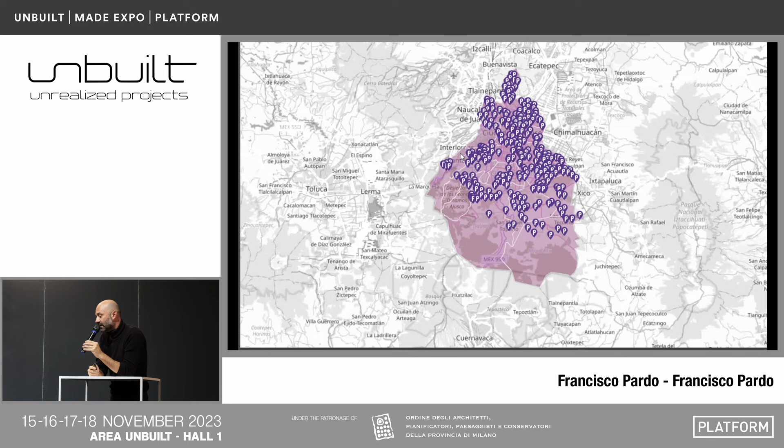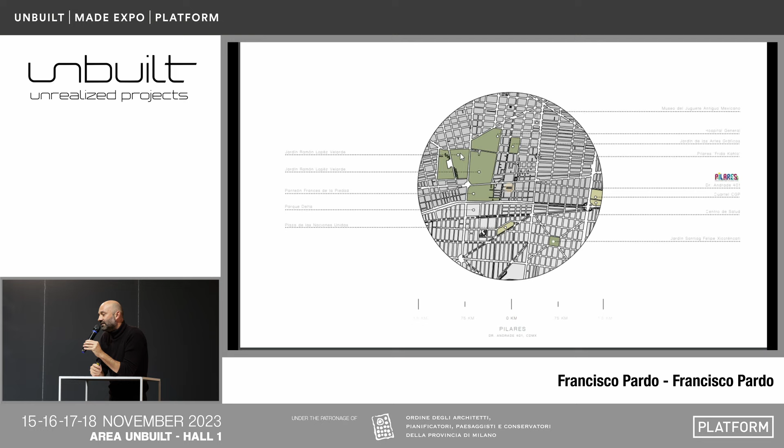This is the one that they gave to us. It's in a very important part of the city because it's one of the most dangerous areas, a place where they sell auto parts. The building we got is an old care center for kids from the 50s.

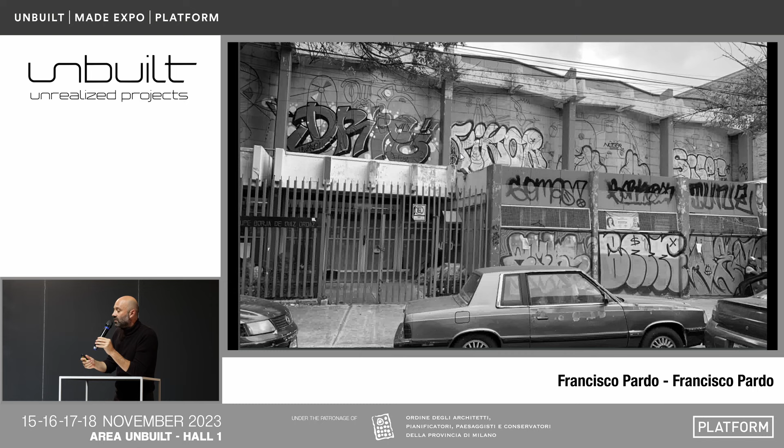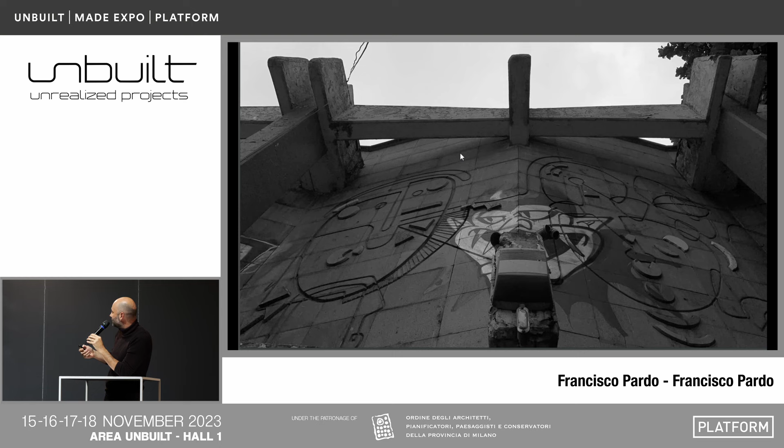It's part of the health department. They had this infrastructure, beautiful buildings, but very decayed. We were asked to use this building and transform it into this Pilares project. It's a fantastic structure from the era of the modernist movement. So this is the actual condition of the building.

Our proposal starts by following certain rules of engagement to do a project. First, we don't demolish anything that is good quality. In my office we have a rule that when we do retrofitting, working in existing projects, we do not demolish anything already built that has quality of architecture. But also we don't do fake historics, we don't do anything that isn't of the time of now.

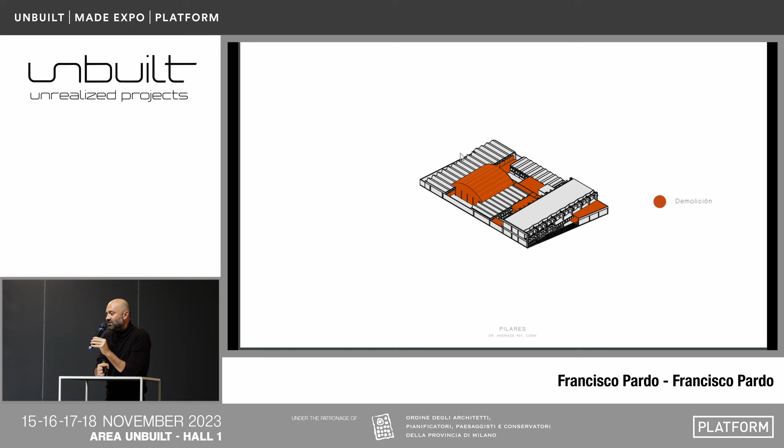So the first idea was to demolish everything that was done after the building was built, these ephemeral structures that cover the patios. The decision was to demolish this and leave the clean structure as it was. That is this one.

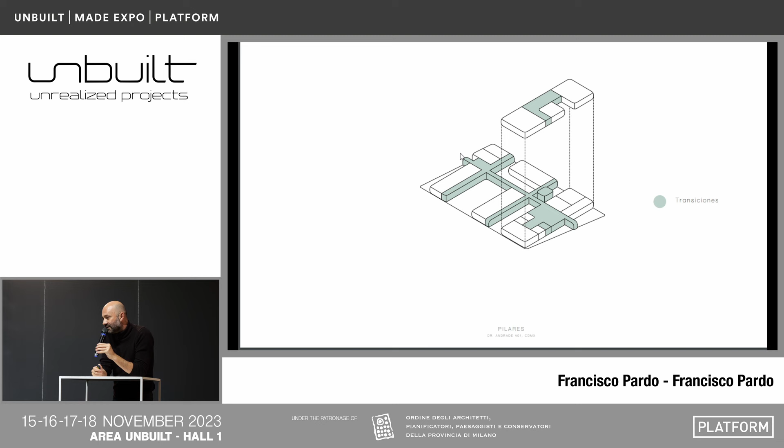Then we start to do some programming like this, and each one of these structures has one different activity. That's construction - studios for carpenters, for mill workers, for everything that has to do with construction.

So the idea of the government is to train, besides giving everyone the opportunity to do a career like a doctor, an architect, an engineer. The idea is also to do these technical, professional things that are important for our society. We need all the layers of manufacturing.

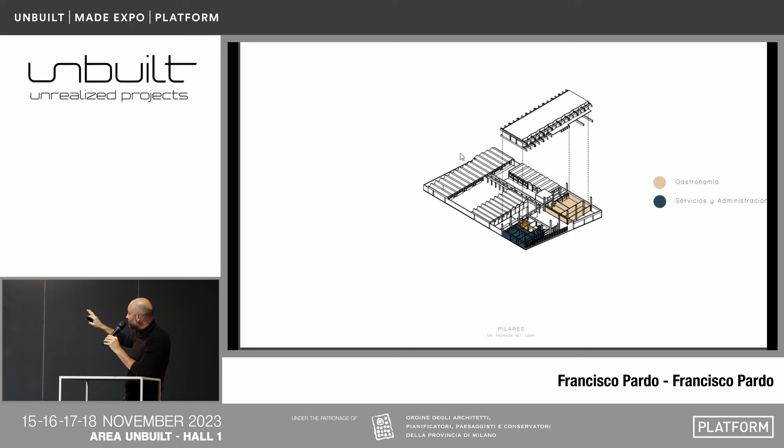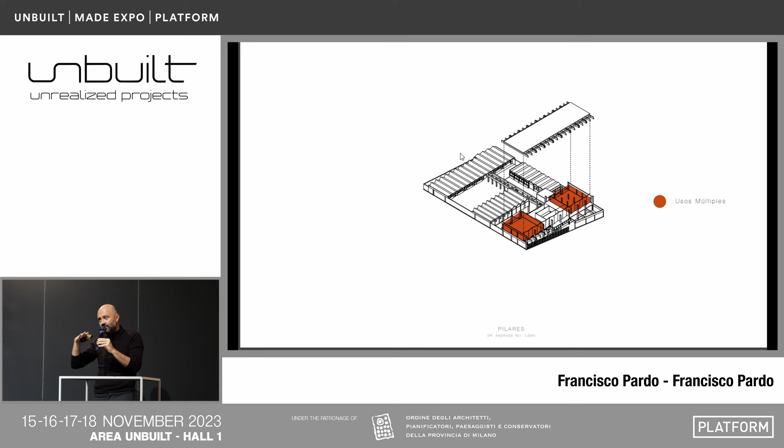So this is art and design. This is technology - technology has to do with computers, apps, robotics. There's another part that's very important, gastronomy, and of course services and administration. Then in the upper floor we have a couple of auditoriums - one serious auditorium, and the other a multiple use space.

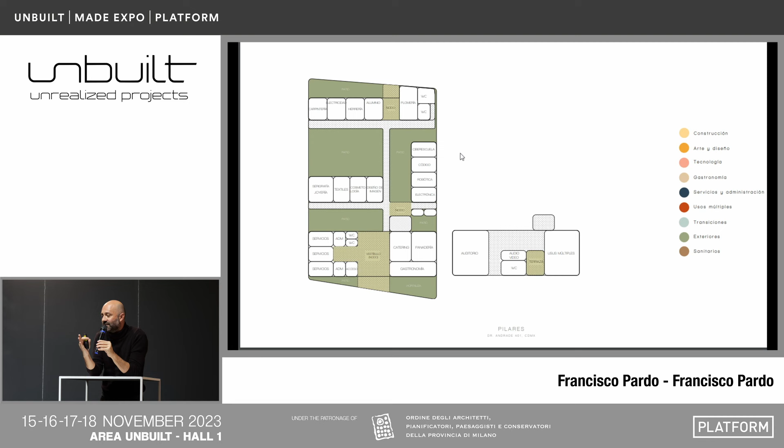Very complex drawings that I'm not going to go over, but it's important to show that the structure of the building was kept as it is. We just reprogrammed the whole building. So this is a fantastic drawing that we really like.

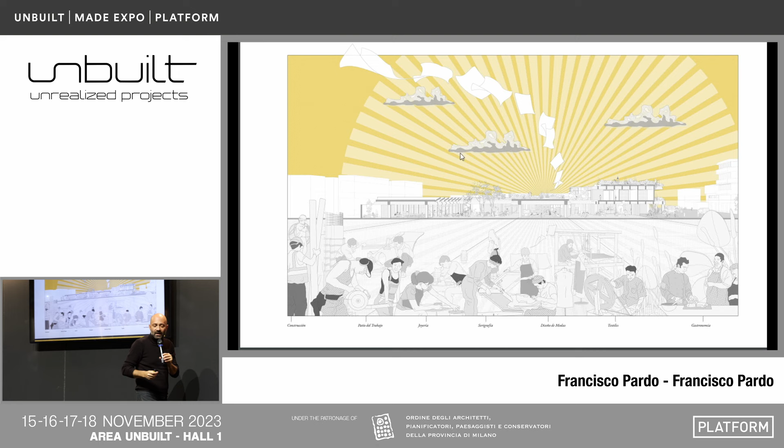Laura and I worked a lot on this drawing to show the activities - gastronomy, textiles, design, serigraphy, jewelry, workers, construction. It's a drawing that puts the whole landscape of possibilities. I'm going to go into detail, so each one of these spaces has to be active.

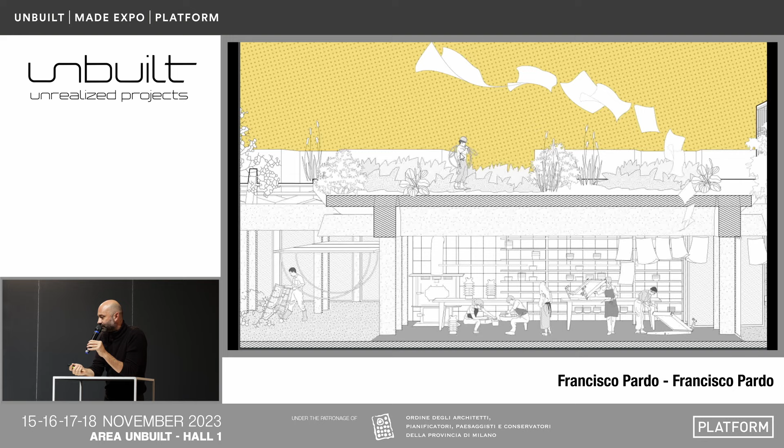The activities done here are based on the necessities of society in a culture and place like Mexico, where you have a poor demographic that is really bad. So the aim is bringing people to know how to do certain manufacturing things. I'm going to run through this beautiful.

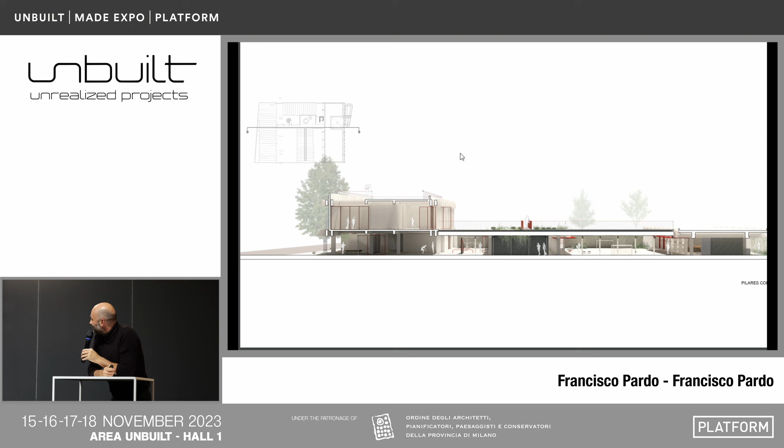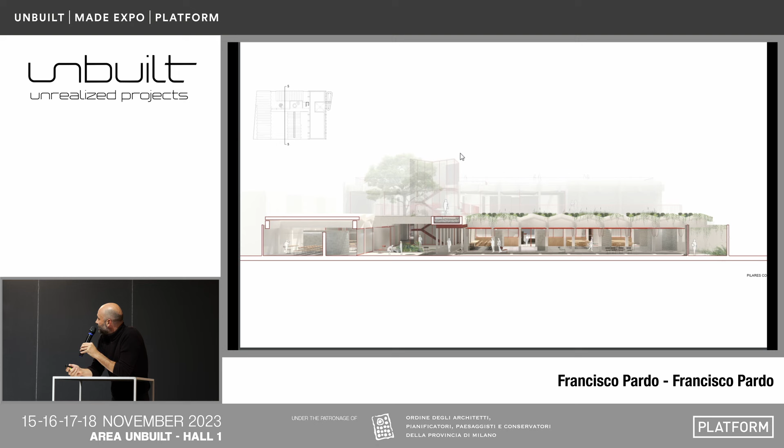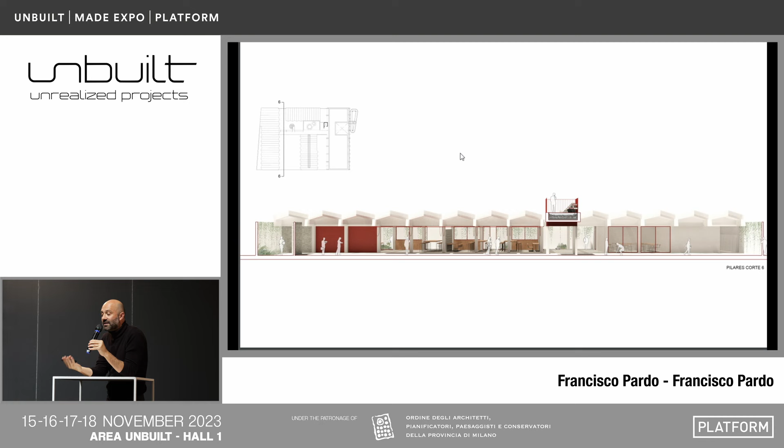So these are different sections of the building. If you see, the building has this amazing roof, how do you say, I don't know the word in English, but this roof that brings all the light from the north, that is fantastic, because this used to be a care center for babies. So it was part of that structure that was already working. So what we did is we just reprogrammed the whole thing.

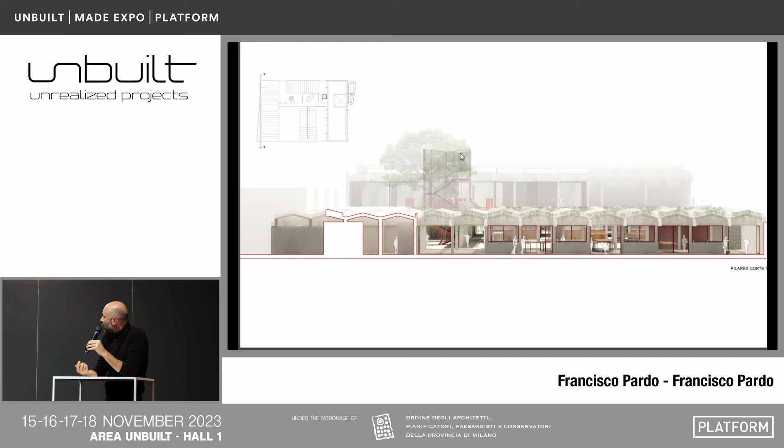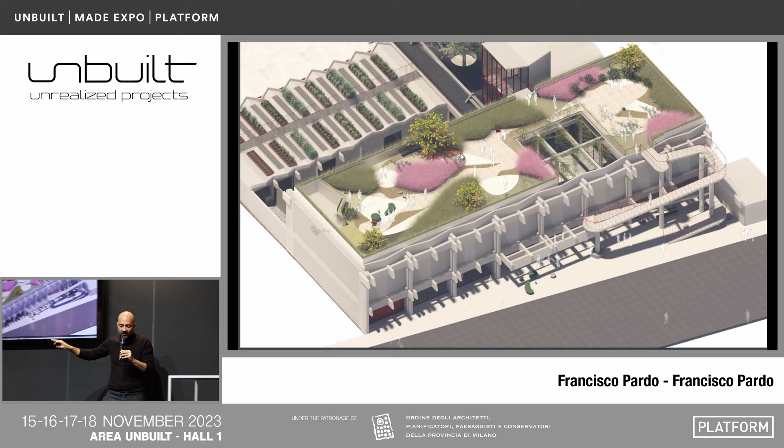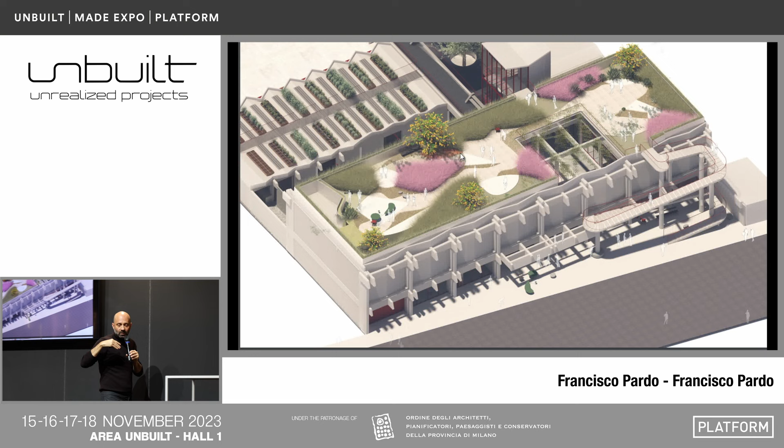There's one important thing I want to mention. This is a street, and it's a very dangerous area in Mexico City. So one of the things we said is, let's get rid of all the walls, let's put a staircase that will bring, eventually if the building is closed, you can actually go up and use this as a public park. The idea of having a public park in a completely complicated area in the city is what we think can lower dangerous areas in the city.

If you bring more public space to the city, it will engage society, teenagers, in a positive way. So public space was a very important part of our discussion, a big discussion with the government, because of course our clients wanted to do a big wall here and a gated guy with a machine gun, closing the whole thing. But for us it's very important that the building breathes and continues to the inside as a public space.

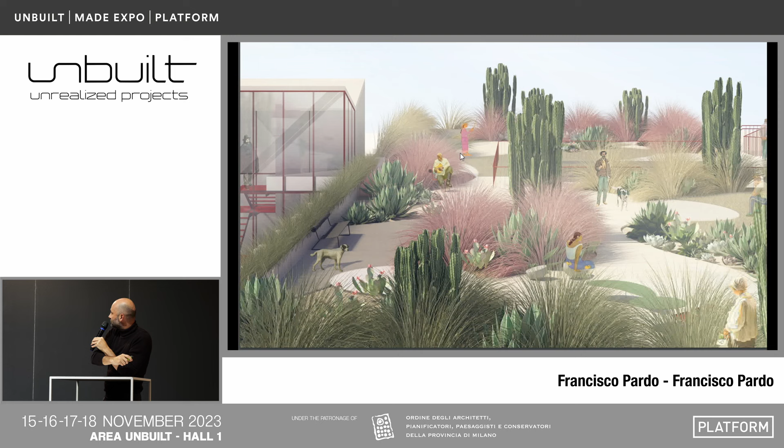This is the interior of the renovation. And then also the use of the roofs as a landscape and as a place so that you can plant and teach young people to produce crops in these gardens. This is a public park on the roof, sports facilities, but also places for work that open through these big doors.

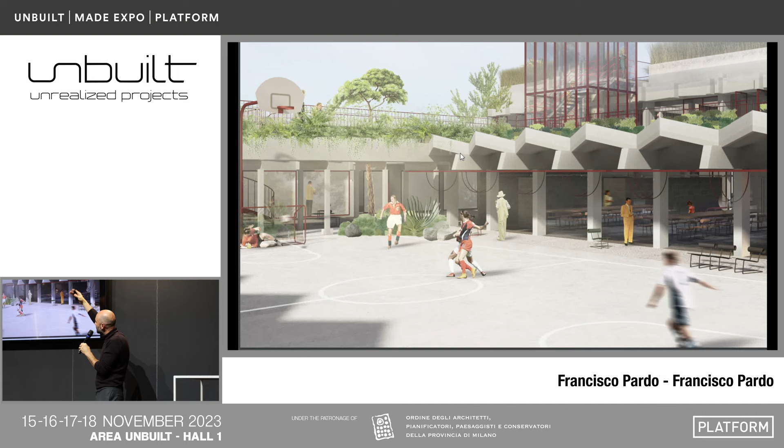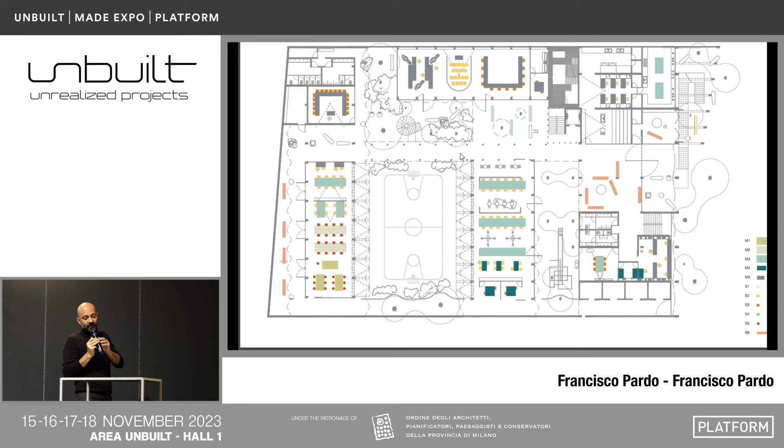I'm going to explain a little bit here. This is the street, this is the administration facilities, this is a service access, and then you have construction here. Then you have technology in that area, arts and crafts, and then you have gastronomy, which also serves the street as kind of like a restaurant.

In the upper floor, you have an auditorium right here, and then a public art facility, open. And then this is studios for radio.

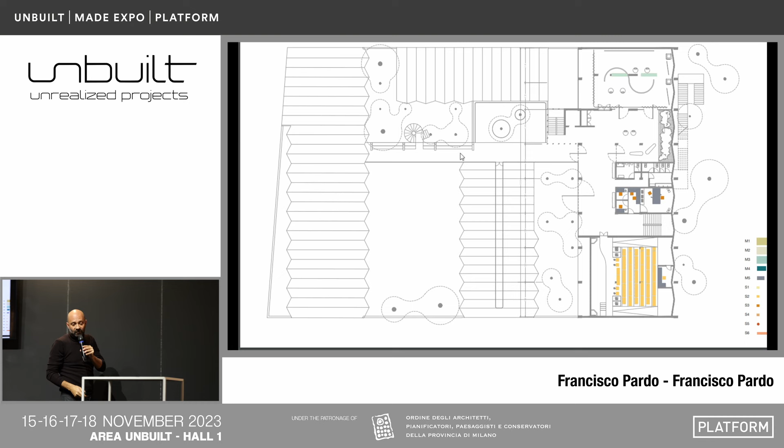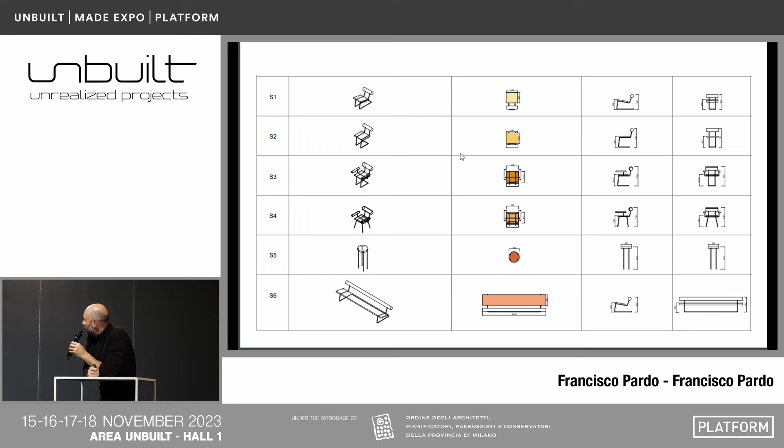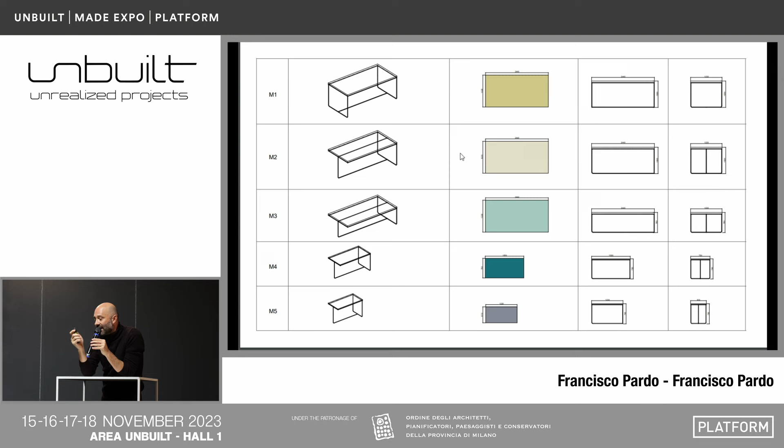And then also we designed the furniture. The furniture was very important, and I think Laura put a lot of effort in doing our own line of production for this venue. Very simple, very cheap, just two materials, kind of like this rod of steel and wood paneling.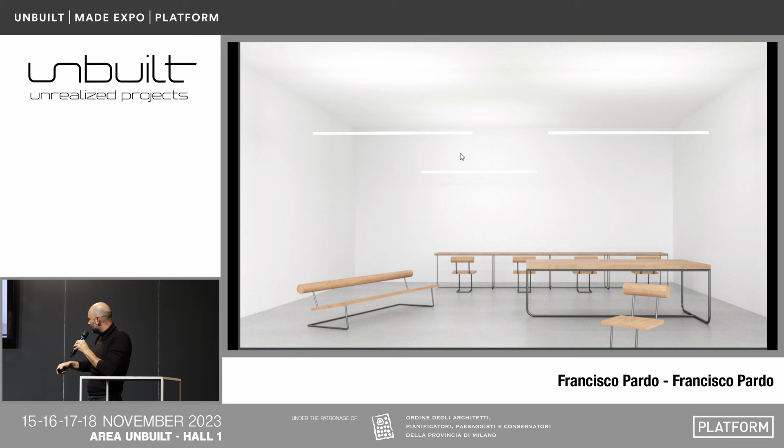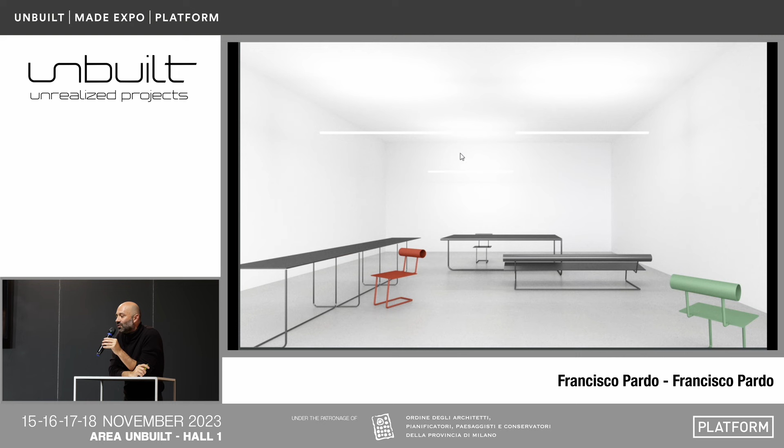In the way of doing this, because we didn't have a lot of budget, we decided not to buy anything from furniture lines that are very expensive, and instead use the advantage of being in Mexico, where we have very good labor and cheaper labor than in other countries. So we could manage to do our own furniture line.

Very simple, very pragmatic, flexible. That's our furniture line: tables, stools, chairs, sofas, and everything you need to actually work. We wanted this to be the line of Pilares, the whole Pilares system. If we could manage to produce furniture, then we could sell it to all the other facilities.

Remember, this is a 300 project, 300 buildings throughout the city. Now they've built about half of these projects, more or less, and unfortunately, because of the change of government, they stopped building these projects, but eventually this will happen in the future.

This is our most important drawing, one that has to do with this social condition of architecture. We do believe that architecture is the way to change societies, change cities, and change the new way of living. Thank you very much. Thank you.